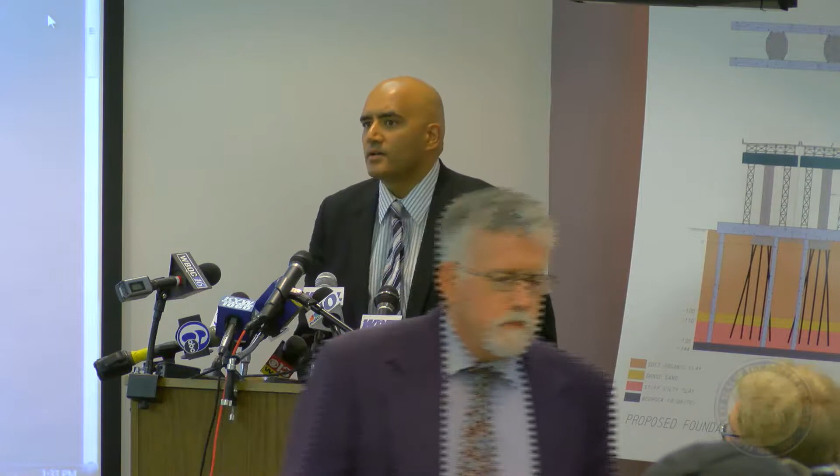I want to thank everyone for coming over to Wilmington today, over to our Beach Street DTC facility. And we're going to take you through what our plans are to get this bridge reopened as quickly as possible.

Now, I want to be very clear. I'm going to start this narrative from around 2 p.m. on Monday, when I became aware of a serious situation with the bridge on I-495. At that time, I made a decision pretty quickly after that to close the interstate and the bridge.

And I want to be very clear that there are a lot of questions about what caused the bridge to tilt, what information did we have prior to the closure of the bridge that might have changed our actions. I want to be very clear there will be an appropriate time to deal with all of those questions. We are very interested in getting all the answers to those questions, but our primary focus right now is prospectively, how do we get this bridge back open to traffic for the 90,000 people a day who are using it.

One of the other things I would like to point out, that when you close an interstate, it is a big deal. And so as the Secretary of Transportation, I did inform the governor shortly after our decision to close the bridge. And I did not speak directly with the governor. I spoke to the chief of staff, who walked in and interrupted the governor in a meeting. And within a few minutes of having that conversation, I had received a confirmation that the governor had accepted our recommendation and wanted us to close it pretty quickly.

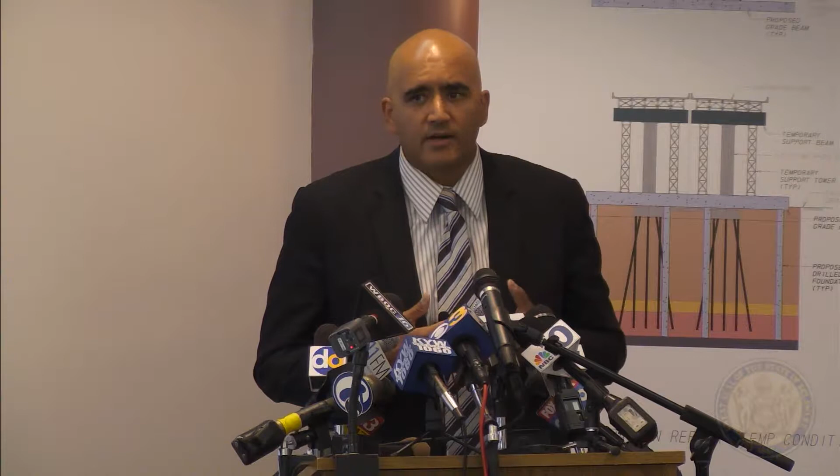And at that point, our decision was, do we need to close the bridge immediately, i.e. there is a chance of this bridge failing, and we need to stop traffic by driving trucks on the bridge and preventing traffic from continuing. And from our analysis of our engineers' reports, we decided that we could do it safely without causing traffic chaos. And so we got the crash trucks and the cones, and within a few hours we were able to close the bridge, and we did it safely, which was something that we were grateful that we were able to accomplish.

And I'll also detail some of our activities this week, but as soon as that bridge was closed, our thoughts immediately turned to, how do we get this bridge back open? And so what we were very focused on doing is getting the right team of experts in the room from across the country, who could literally tell us what was going on with the situation and how we were going to be able to get open again.

And so on Tuesday, and Harry, I believe, was at the bridge on Monday night from AECOM, and on Tuesday I walked into a room and we had folks from AECom, and again, Harry is here today representing AECOM. AECOM is a multinational firm with thousands of employees, and so there's a lot of folks at AECom that are not here today because they're busy working on the solution.

And we had folks from the Federal Highway Administration, and not just our local folks, but we also had a geotechnical expert who had come in, who had worked on the issue in Wisconsin a few weeks ago, because we knew that there was a subsoil issue that had to be addressed. We had civil engineers from the University of Delaware. We had actually asked a gentleman who is considered to be an expert on this matter in terms of bridges to come down. So we literally had all of the experts together in the room to determine how we're going to get this back open.

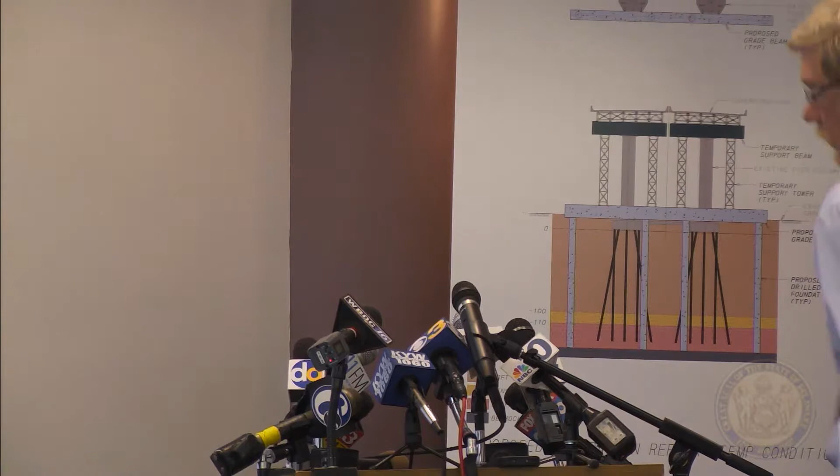My name's Harry Roker. I work for AECOM Engineering, approximately 45,000 engineers around the world: engineers, professionals, planners, construction people. My own background is primarily as a bridge engineer, and relevant to the 495 project, I have worked at different times on emergency projects restoring bridges after derailments, ship collisions, truck hits, and storm washouts. I've done that both as a designer and working with the construction forces to restore the bridge.

About 37 years of experience. With that, I'm going to touch base on the background of where we're at and then carry forward. The boards are basically in order and they'll be up, but I'll work off the PowerPoint. This is an aerial view of the bridge with the piers. Just to make it clear, the bridge is basically two bridges, loosely tied together. There's a small tension tie, that's the little bar here. Each of these is a foundation. We call this a pier, and then we have an east and a west. This would be west, this would be east.

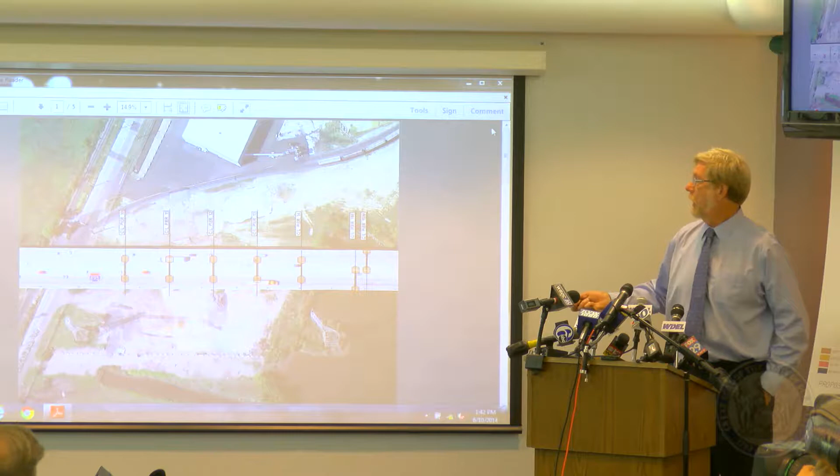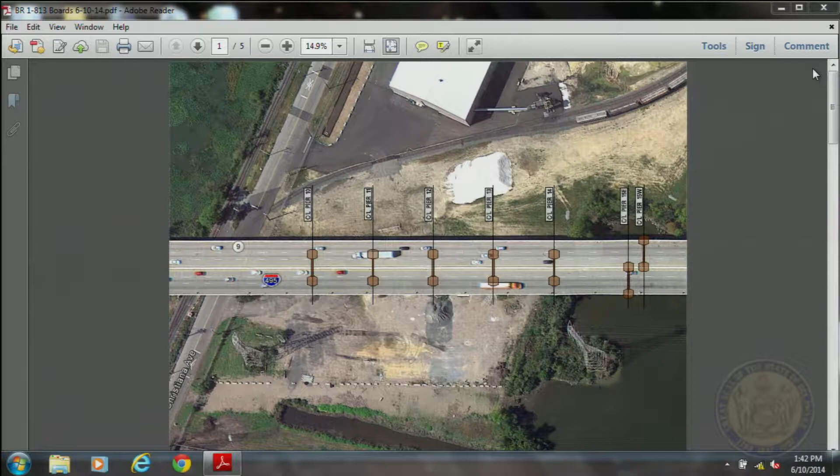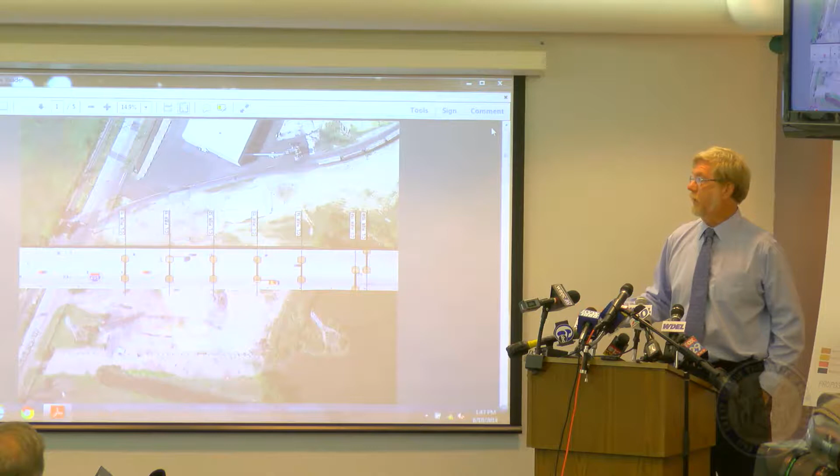From Pier 10 left or south, and from Pier 15 to the north or right here, Delaware forces have been inspecting the bridge, and we have no signs of distress in any of the other areas of the bridge. So what we'll be talking about primarily is this zone from Pier 11 to 14, where we have evidence of distress. This view is exaggerated to show the conditions and to allow everyone to understand what we're facing.

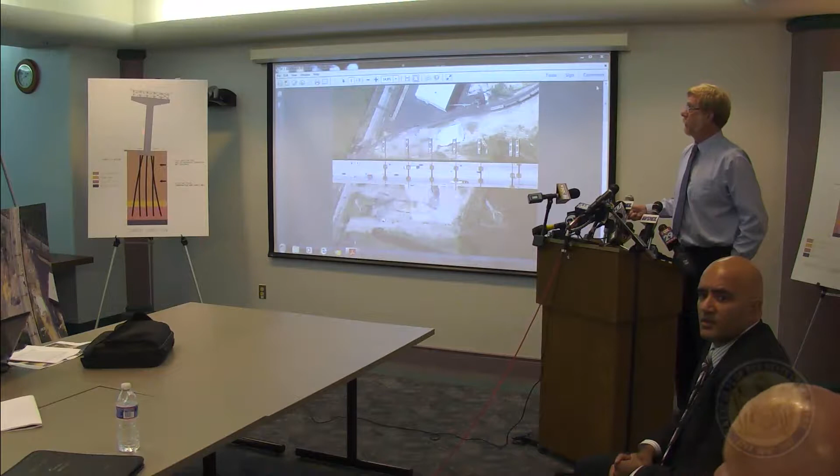The bridge has leaned. This is only one of two hammerheads; again, it's a paired structure here. What you're seeing is a lean produced, we believe, by a lateral force pushing against the original bridge foundation, which consists of steel piles tied together near the surface by a concrete foundation or footer. As you can see, with the leaning of the pier, there is a distortion in these piles.

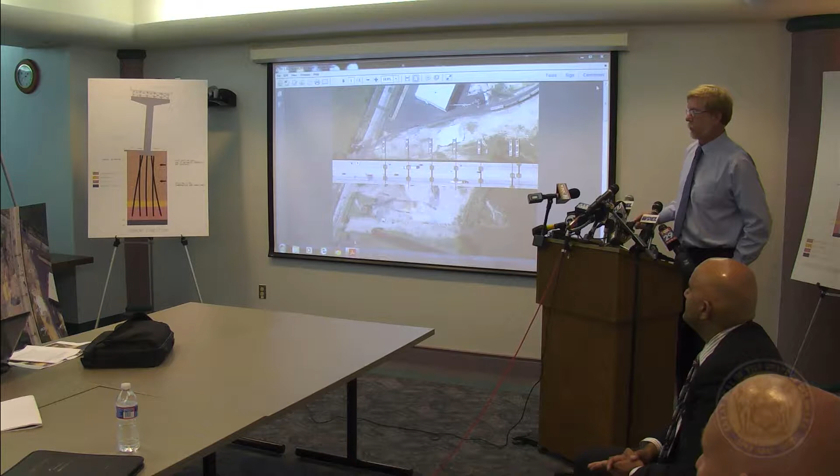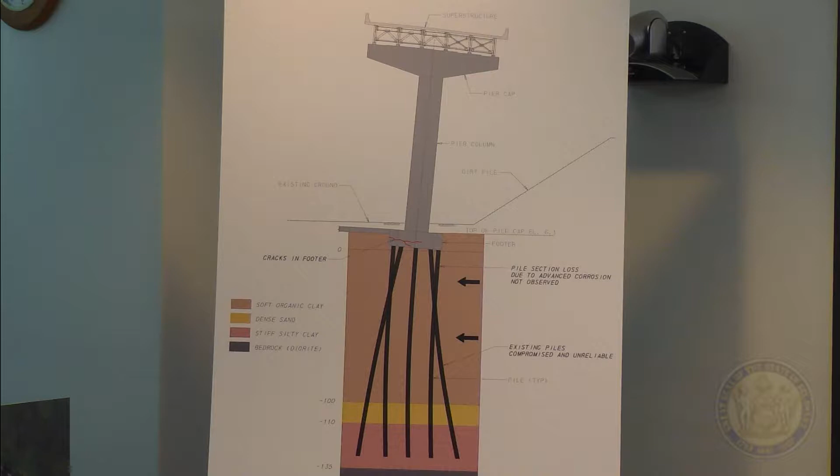The piles go through soil at the top that is largely fill of a mixed composition. Then we have a layer of extremely poor organic clay that is probably compacted, long accumulated mud from when the river used to run here. And then down into stiffer material, sand, a stiff clay and bedrock. The piles originally went down into that stiffer material and went through this loose, very poor material that can be easily consolidated and compressed. That's the organic clay. We've seen some distress at the foundation level, and the piles are bent.

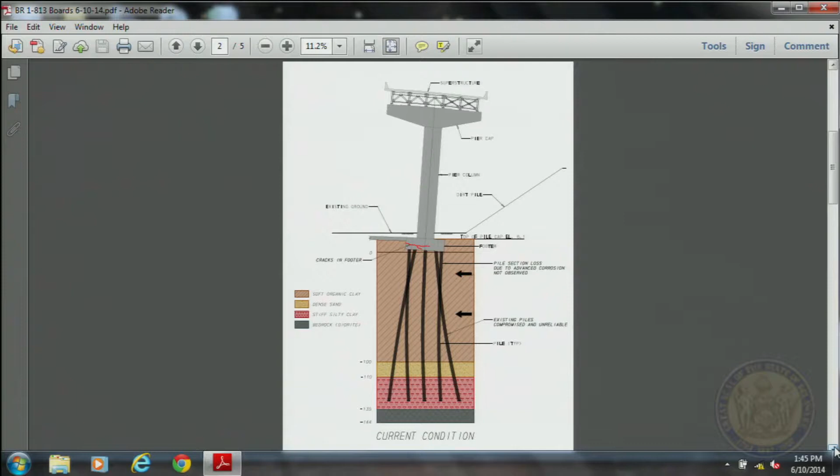Basically, the conditions are telling us that everything in the ground is no longer reliable and can no longer be counted on for the long-term solution or for what we need now for jacking. A concern about jacking through this compressible material: if we tried to land at grade level, it would load the piles that are already compromised or potentially compromised and unreliable. And the support provided by this soil is not good and very springy. We would anticipate a great deal of variation; it's just not very stiff.

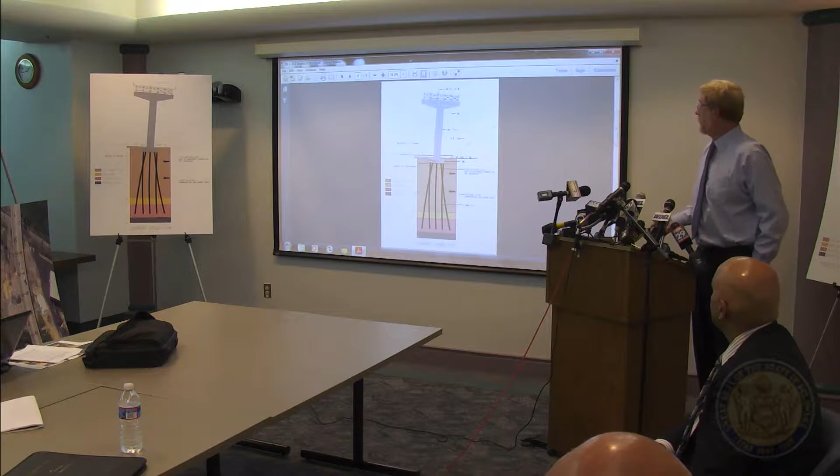The solution is to sink new foundations deep to bedrock. We've designed around the materials that are available. What has been designed, and is underway now with procuring materials and equipment, is a 4-foot diameter concrete shaft. It'll be reinforced concrete within a steel casing. The casing helps to sink the hole from grade level approximately 100 to 140, maybe 150 feet deep to the bedrock.

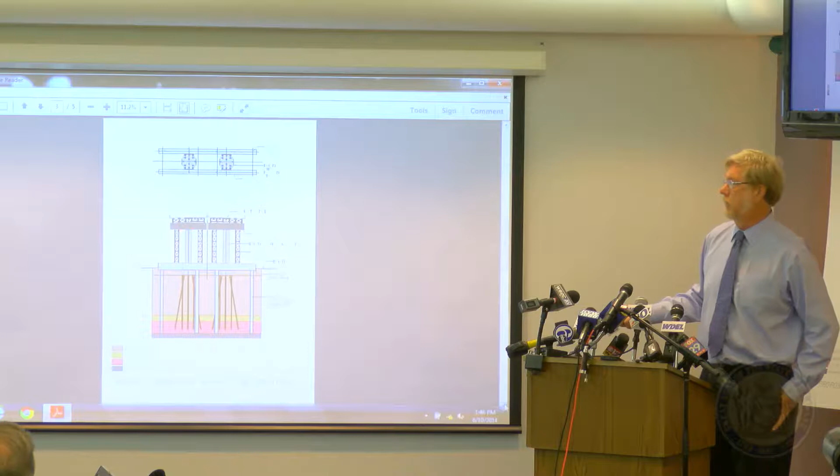There will be 4 per hammerhead, so 8 per pier, tied together with what we're calling a grade beam, a concrete beam that will be constructed once these shafts are in place. The concept, and I may ask Greg to elaborate on this, will be jacking towers off that grade beam to get support up to the superstructure, the girders and the roadway. Okay.

Hi, I'm Greg Burkhart. I work with J.D. Eckman. We're a general contractor. We do roads and bridges. We've worked on several different bridges in Delaware. We've done I-95 through Wilmington, the Wilmington Viaduct. We've done emergency jobs for DelDOT. I-95 over the Brandywine a few years back had a crack, and we were called in to fix that.

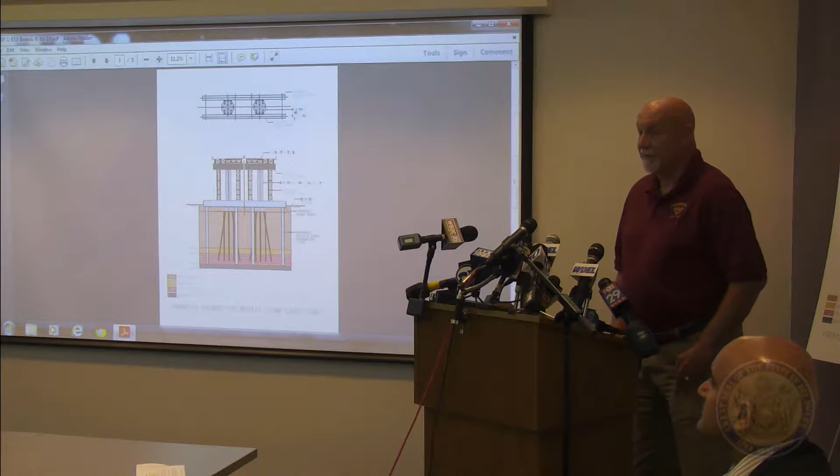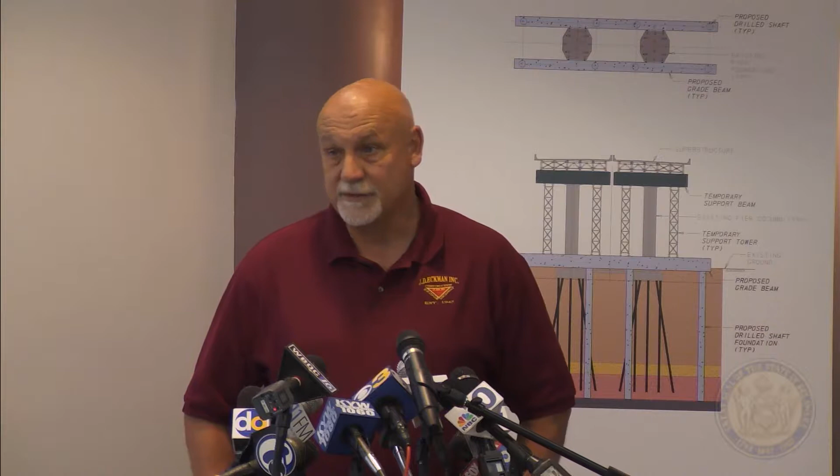At 10th Street, a truck ran into it. We were called in to shut I-95 down for a weekend and restore traffic by Monday. We've also done several jobs throughout Pennsylvania. Most recently, the Harrisburg truck fire over top of 81; we restored that traffic in 4 days. We've also done Richmond Avenue, I-95 in Philadelphia.

There was a cracked column. We were called in by PennDOT to come in and jack the bridge up and fix the bridge there. So we have extensive experience with this kind of work. We have 8 licensed professional engineers on staff that this is all we do. That's their job, being jacking plans and erection plans and demolition plans; we have the people in-house. So it gives us a little bit of an advantage to get answers very quickly.

When I was on vacation last week, I was called by DelDOT to come up, so I had to leave my 6 boys and little kids and go to work. So we called up, and I walked into the meeting, and to DelDOT's credit, everybody that I knew that was an expert was there. Between HNTB, Federal Highway, Ted Zoli, who I've known for quite a few years, and we've done emergency work together.

Okay, so that's sort of my background. I'm a structural engineer by trade. I don't do that so much anymore. I got other guys that do that, and they're much better at it than I am. But that's my background. Every aspect of this job we've done. We haven't had a specific job exactly like this, and I don't think there ever will be, but every part of this job we've done, as far as drilling the caissons down to bedrock, installing the caissons, the grade beams, the jacking. We've done hundreds of bridges for jacking.

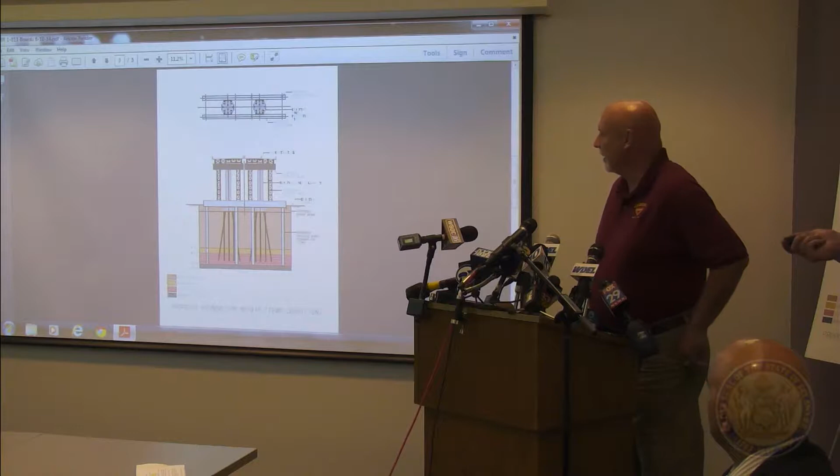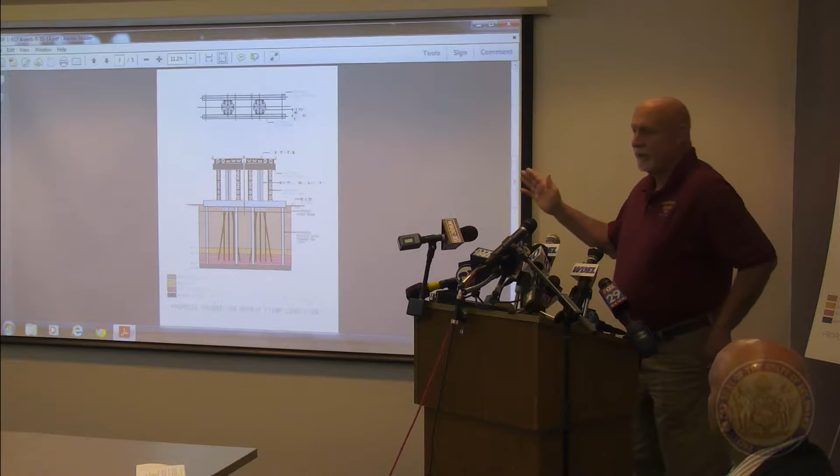So the concept is to put that grade beam in, put jacking towers on top of the grade beams, and then put a header beam across the towers. There we'll then put on hydraulic jacks, and typically they're 100-ton jacks. And if we need more than 100-ton, we nest them together or use bigger jacks. In any particular northbound or southbound, there's 6 girders, I believe, and there'll be 4 piers. There'll be 24 jack locations, and we're jacking everything simultaneously. And we'll have feedback from every jack to tell us where it is in relationship to the other jacks, so that we can get this back up to the proper height and alignment. Okay.

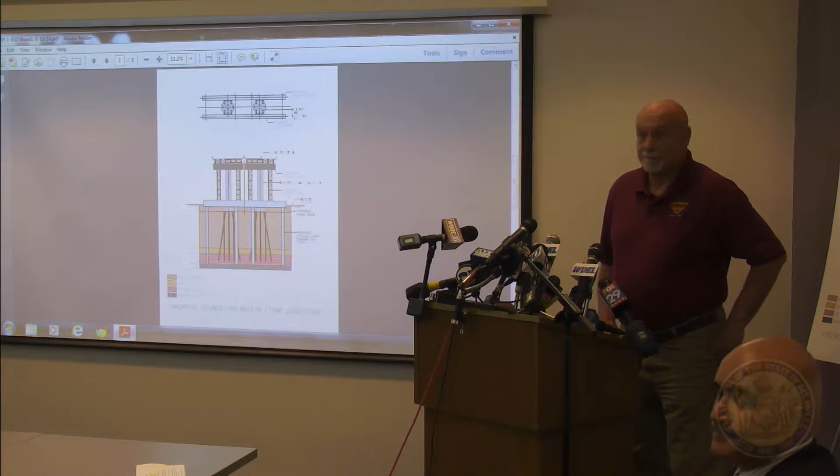Oh yes, you can take this out. Okay. And Greg points out the number of jacks. One point to note, excuse me.

One point to note is for the piers that we're planning to do work, these girders run continuously across the supports. And so we have to look at it not just one span at a time, but as a continuous unit. It is known as a continuous girder. And that's relevant to the jacking plan, also relevant to assessing the loads and the stability of the superstructure. What you're seeing are the 4 piers. In all cases, we are talking about going to bedrock with a new foundation because the existing foundations are deemed unreliable. There are basically 2 types of configurations once we get that new foundation in place.

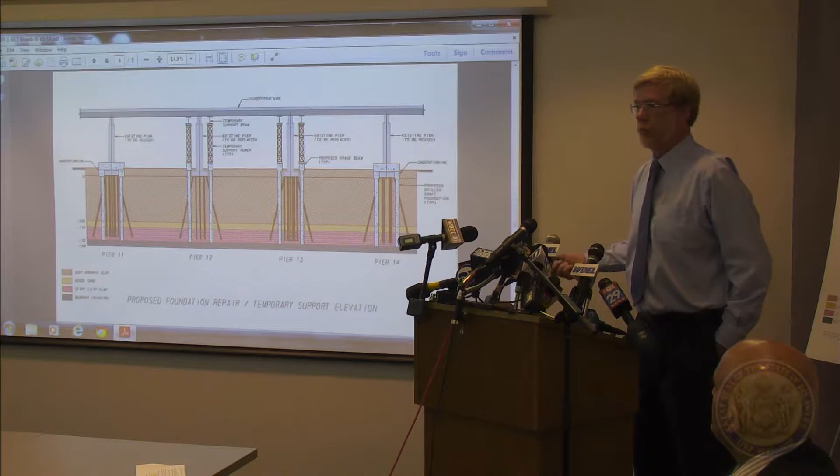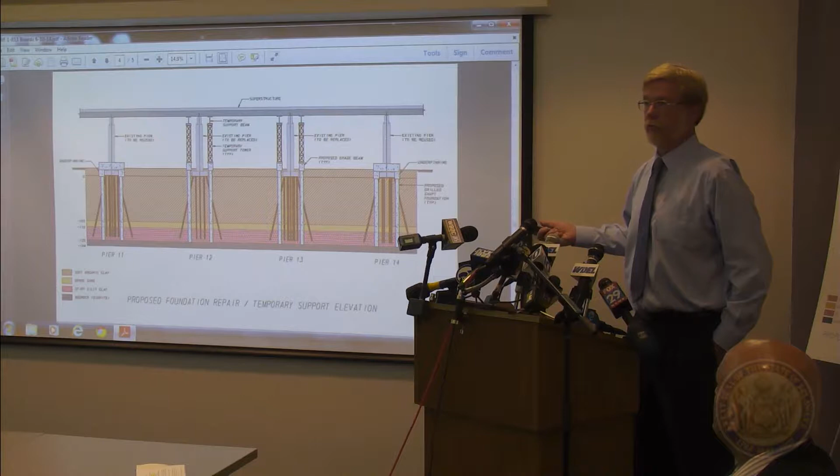On Piers 11 and 14, we believe the piers themselves above ground can continue to be used. And so we will be essentially underpinning those piers to our new foundation. In the case of Piers 12 and 13, where the leans are much more severe, we anticipated it's a better solution to get loads and support for the superstructure to allow traffic to resume on the temporary towers, and then to take out the existing piers and build a new substructure on new piers on our new foundations.

And actually the next slide shows the other direction. Basically here again, 4-foot shafts down to bedrock, that common beam that was used to jack, and this shows that what we're proposing is what would be called a 3-column bent, a different configuration, but 3 columns supporting the existing superstructure.

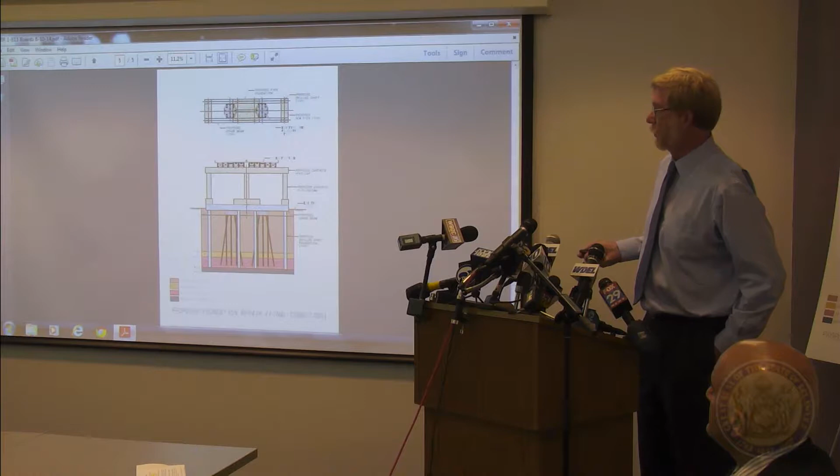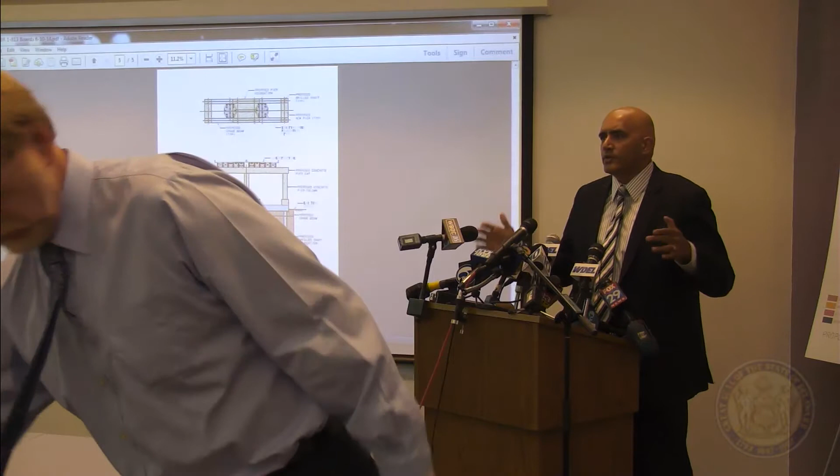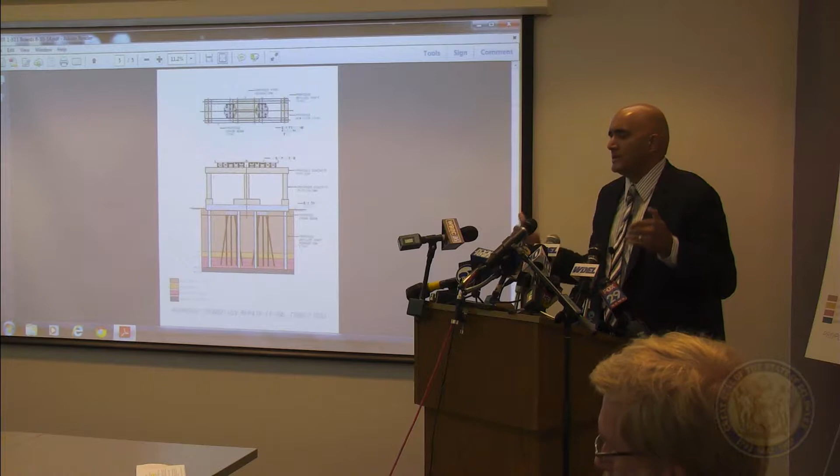So we're going to open it up for questions if anybody has them. Before we do, I just want to go over a couple of other items. We put this out yesterday, but we have been looking at all of the traffic options in terms of ways we can optimize routes, getting the message out to people both in the area and in the region, that if they're coming down from New York, to stay on the Turnpike and take the Delaware Memorial Bridge across. We do have a closure on 95 northbound this week, a part-time closure between 10 p.m. and 5 a.m. We had planned to close 95 and 202 for that construction job this weekend.

In preparation for that, we had removed the asphalt, and under the heavy traffic the road is unraveling a little bit, so we are going to have lane closures from 10 p.m. to 5 a.m., but they will be monitored. Our traffic folks have looked at the traffic counts at that time. We believe the counts are low enough that traffic should not back up, but we'll be monitoring it, and if it starts to back up, we'll pick up the closure and flush the traffic through. We've been getting a lot of questions about that, so we just want people to be aware that we will be continuing to monitor traffic conditions, providing that information on our website, and continuing to provide these updates as we go along. So Jeff, I don't know if you want to come up and moderate the Q&A.

Okay, thank you. Actually, I think what would be effective is if all three of our speakers would kind of gather around so that when a question is germane to your area of expertise, you can step to the microphone and they can get their audio. So at this point, please, and be aware, these guys are very busy. They've got a bridge to reopen, so our time here this afternoon is somewhat limited, so this is your opportunity to ask questions. Thank you.

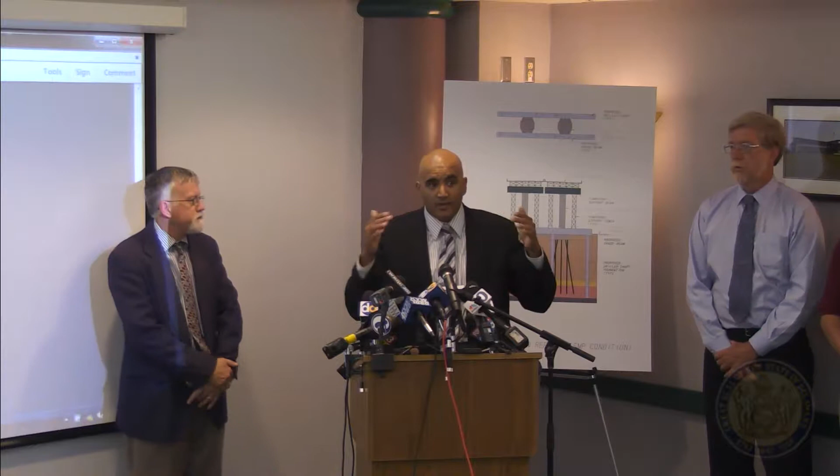Yeah, so I'll pull Harry in on the foundation, but for the layperson who is not a bridge person, basically we want to make sure that this bridge is sitting on concrete that goes down to bedrock before we reopen it. And that is what we're going to do. In terms of the southbound versus the northbound, right now, because there's a lot of stuff that we don't know about down 140 feet, we are estimating Labor Day for the southbound, and they're saying it's 2 weeks to a month potentially for northbound afterwards.

When that happens, we may determine that if it's only going to be a week or 10 days, we may wait and just open southbound. If it's going to be a month, we might look at opening two-way traffic on the southbound. We might do it directionally based on time of day and traffic counts. That'll be something we determine. And Harry, do you want to talk about the foundation?

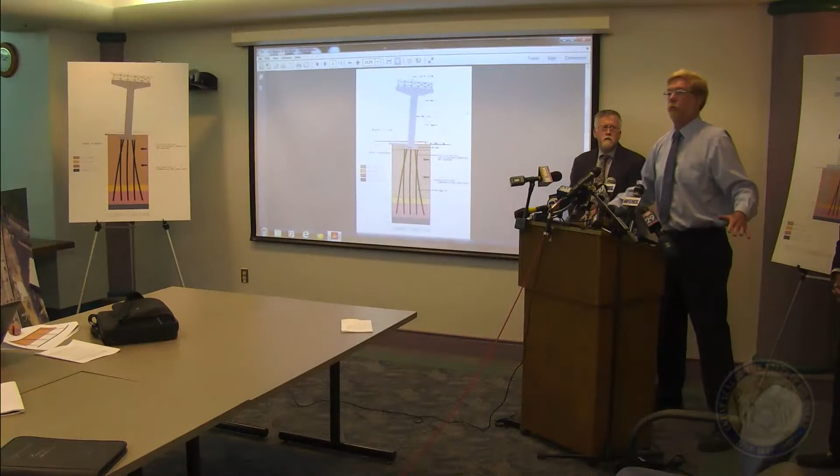Yeah, basically, it comes down to the conditions over here. Two major points I will highlight. One of them is the depth and the nature of the soil, approximately 100 feet of extremely poor soil. The second point I did not elaborate on. There are two types of pile. We call these plumb piles, basically straight up and down, and batter piles. The original designer used those batter piles the way you would spread your feet to be more stable. Perfectly fine thing to do.

However, in conjunction with that poor soil and the addition of load, it has a tendency to bend those piles. So anytime you load that, you bend these batter piles. They are particularly susceptible to damage. We had piers that were already leaning, and any load that we put without bypassing the uncertainties of them and the soil risked bending them further, and all the while we have a bridge up top.

So the scenario that we went through in trying to not go deep basically kept pointing back that every time we would try and take the load, we were likely to move that pier, and we still didn't have the bridge lifted up yet. The jacks will go whichever is weaker. If the soil provides less resistance than the weight of the bridge, it goes down. And that is likely to have happened, and the ramifications in the compromised foundation were too much of a risk.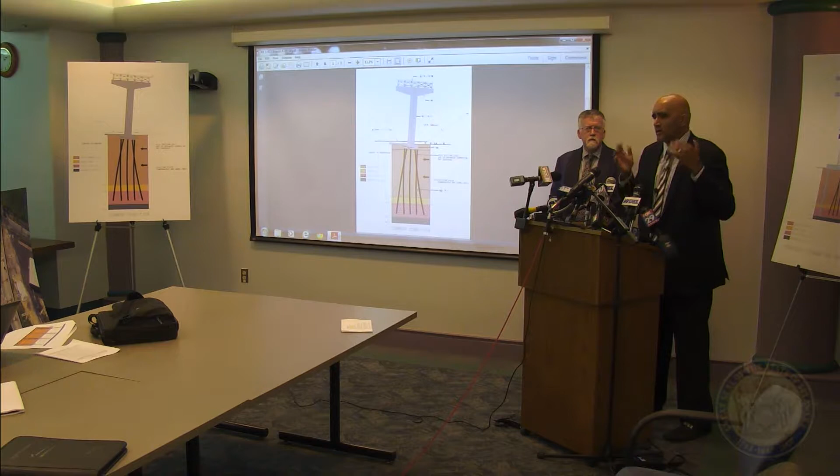Okay, thanks. Next. So what caused the tilting? Is it underground soil movement? So I want to be very clear that we are looking at all potential causes for the tilting, and we will continue to provide updates on that, but it's a little premature right now to definitively say what caused the tilting. Not only do we have tilt sensors on the bridge that have shown that the bridge has stabilized and has started to rebound, but we have inclinometers that have been put in the ground, and they are tracking whether there is continuing to be any movement underneath the ground. But this design accounts for it even if that is the case.

Well, the rebound came as a result of removing that pile of dirt, so that's clearly one of the causing factors here. That would be something that, again, we're taking as an indication that it was the right move to get that soil out from under there. And so, yes, that is one potential cause for downward force that would create a lateral force.

How did that soil get so close to the bridge to begin with? That is one of the things that we are looking at. You had a fence around it, right? That would be a typical case. We are going back to when the bridge was designed back in the 1960s and built in 1974 to find out were there any rights of way that might have precluded a fence. I mean, there's just a lot of stuff we have to look at, and so I don't want to go out and say right now definitively that yes, a fence was there. We're just running all that down.

Where did all the dirt go? So the dirt, and Rob, feel free to jump in if I don't say this correctly, but all of that dirt is being tested, because we just don't move dirt that might be contaminated. So it was tested. We obtained permits through DNREC, and it was moved to a couple of sites down around the riverfront, I believe, like South Market Street, sites that were in need of fill. In fact, we actually got a call from somebody in Jersey, I think, who is wanting the fill, but we've already found a place for it.

There have been some questions about how quickly you responded, then you hear the 911 call, clear as day, a guy back in April said, bridge is off. He couldn't have said it any more clearly. Yep. You guys going back and looking into your own office to say, like, how did this get missed? Absolutely. I came from the Federal Highway Administration, and one of the things that is part of the culture there, and that we want to make sure is the culture in every DOT across the country, is that bridges are a critical piece of infrastructure.